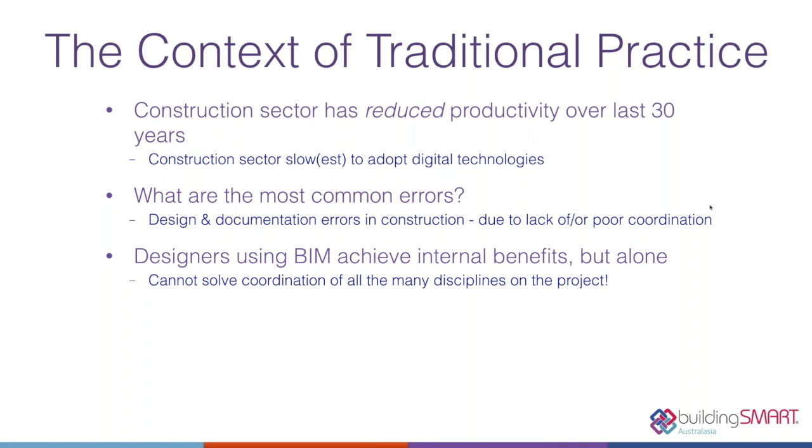And we noticed that although quite a bit of the industry is adopting BIM in their own business, that's not enough. You've got to be able to collaborate and solve the coordination problem. And because we can't share design models, this is another blockage. Where do most of our errors occur? This, by the way, was indicated in an Engineers Australia report in Queensland in 2001 or something. Big structure and HVAC pipe services, small and fiddly equipment, where we have to get down to very close coordination and make sure it's particularly correct.

And of course today, how do we support linear infrastructure, precinct modelling, which is looking at a larger urban scale, and smart cities? How can we address all of these issues? Well, BIM, building information modelling, or digital modelling if we use it more generically, what is its potential? Well, we've got robust geometry. That is proper 3D geometric representations. Objects in a digital model have properties and are extensible. So there are default properties, but we can expand them according to the need or the collaboration we need.

Objects have semantic richness, and one of the important points about IFC is its global dictionary, global terminology. We all talk the same language. The digital model integrates information. We can have reference to other data, and finally, we can do this over the whole life cycle. So we've moved away from just the design and construction process to supporting asset and facility management and operations. And that's where most clients have the biggest benefit.

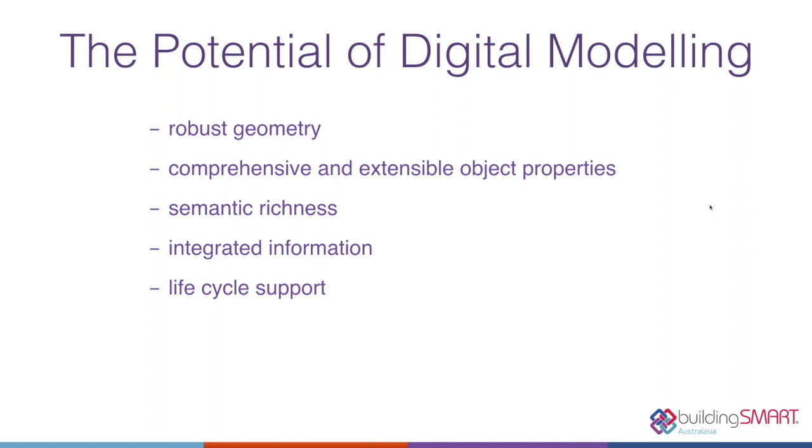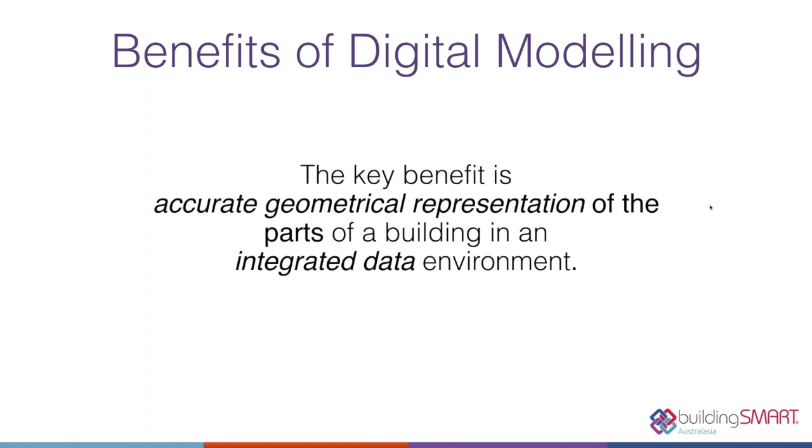So what are the benefits of digital modelling? Well, the principal benefit is this accurate geometrical representation. We couldn't do clash detection without it. We couldn't have high quality visualization without it. And in its integrated environment, we are now able to interrogate with great fidelity. This leads to faster and more effective processes. We can share information easily, which can be validated and value added and reused.

If we share a common terminology, we're always talking about the same object, and that means we can share information easier. We can produce better design. Clients can understand through the 3D visualization, simulation can determine performance, and although that's a modest part of the business today using BIM, that's where one of the next major steps will be. We can have much better understanding of whole of life costs and environmental data. Environmental performance can be predictable. And again, although this is a modest part of the current business, it's a very important element and one that the industry is very close to moving to strongly.

Another advantage is greater production quality. And this, in terms of traditional 2D documentation, is the first benefit. But by production, we also mean manufacturing and assembly. So now we can use the same data derived from the BIM model in the production process.

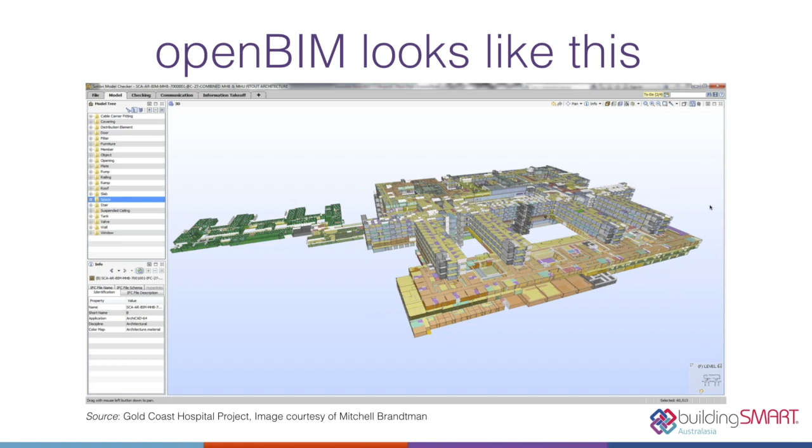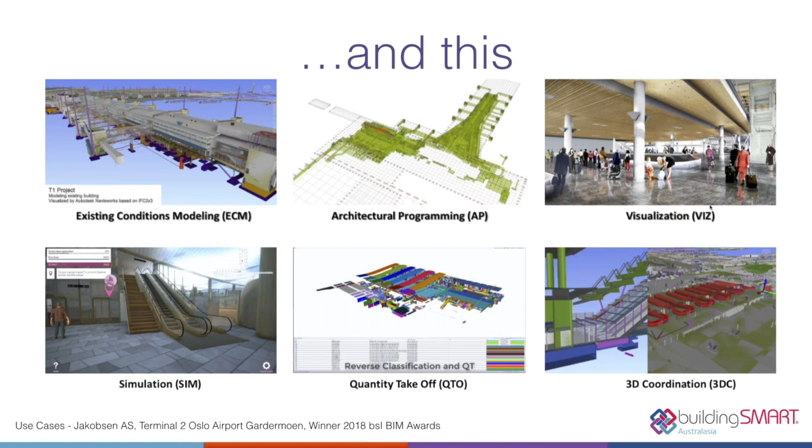What does openBIM look like? Here's a large hospital project in Queensland, a typical large BIM project. Here's another example that's come from the bSI International BIM Awards. Norway won this project, and here we're showing the use cases in the collaboration and how it was adopted for that. And that's just in the competition, some 80 use cases were indicated to show the level of maturity that's approaching in the BIM technology.

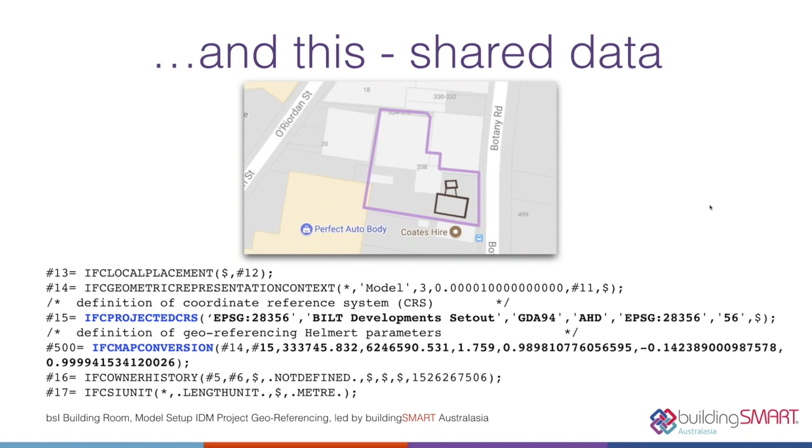And this final example shows how we solve a problem called georeferencing. How do we understand a building that we're going to construct physically on a site versus the object that we might see on a map? And this is a little extension of the IFC standard recently adopted.

So this leads us to, why is openBIM beneficial? Well, the common issue is that there are so many softwares about, and writing interfaces to all of these softwares is just impossible. So the benefits of openBIM: it's a common protocol that allows multidisciplinary digital interoperability, new collaboration processes. For those who've been using BIM, this is one of the biggest advantages. We can now share models rather than drawings, and this improves productivity, identifies problems quickly, all leading to better quality.

I'll mention this point about common terminology. It's very important, and it's one of the big challenges to expanding the use of IFC. We can validate and audit models cleverly by using the computer and the semantics of the data. This leads to fewer errors, more reliable construction timetables, better cost control. Better cost control because we've been able to estimate more accurately at the beginning.

Clients and owners and users don't have to worry about proprietary formats. So you don't have to buy a bit of software because it is the software that your client or your partner use. IFC is available in all vendor software, and we should focus on the information rather than the particular format that has been used. Governments and agencies can be confident that adopting the openBIM approach is international best practice.

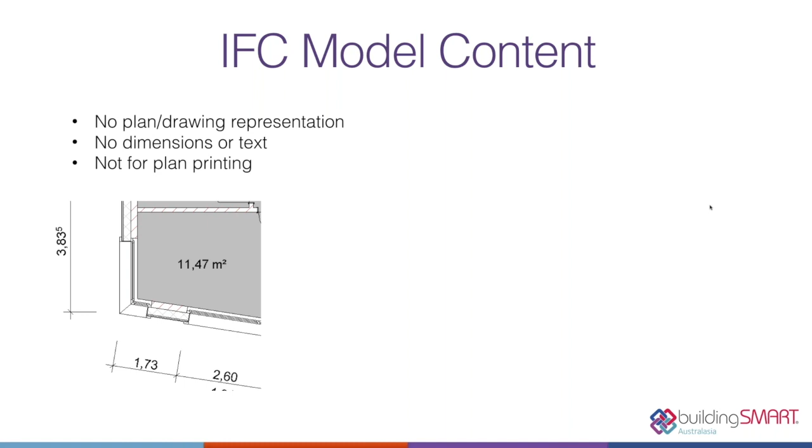And the final one is one of the more important practical parts of IFC, called model view definitions, or MVDs. These translate the process we've defined above into the technical requirements. What actual information we need to solve those problems. So this leads to a question of what is in the model. On the left, you have a traditional 2D drawing. But IFC is a model.

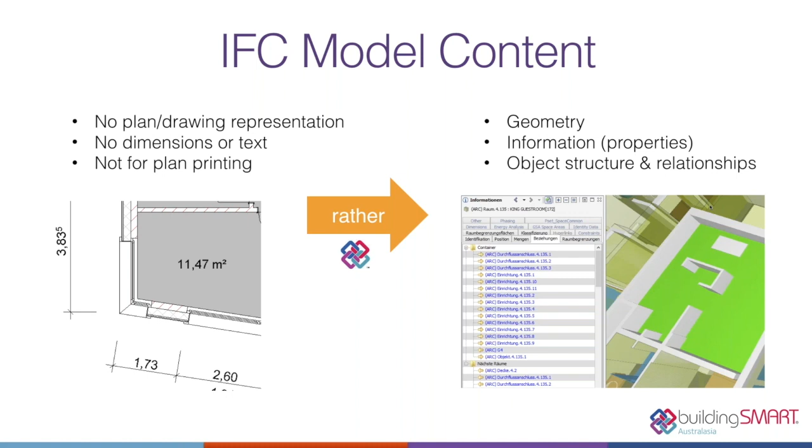So we visualize the model accurately, easily, and then we're able to interrogate and understand the data in the model because it's all part of the IFC schema. We understand the object structure, we understand the relationships. This space is on this building level with this name, of this building with its name, on this site with its site ID, on this project. And this structure is the backbone of how we understand information.

So model definitions have been in place for quite a while. The IFC 2x3 version of the standard developed what was called the coordination view. This is a view that is widely used in the building space, representing the key disciplines in that space. In IFC 4, the next version of our standard, which is starting to be used and has significant improvements, we have another view definition called the design transfer view.

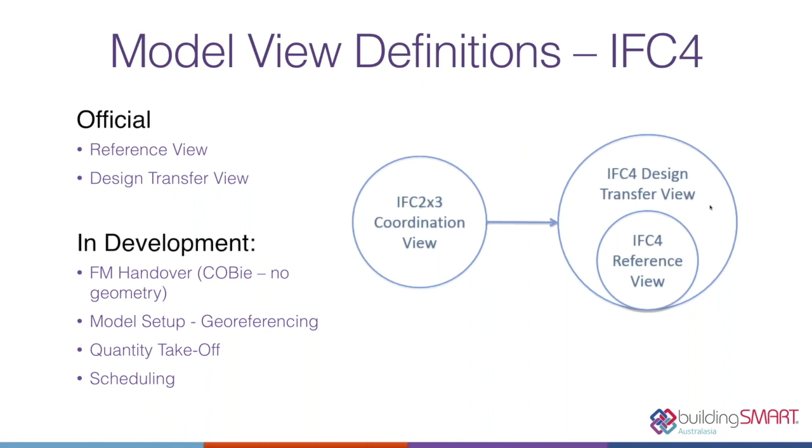This is underway at the moment and is aiming towards a higher quality information content that would allow other consultants to take that model data and use it effectively in a new project or in an extension of the original project. And the IFC 4 reference view is largely common to the coordination view. Other model view definitions are in place. FM, with COBie as a part, model setup, I mentioned that before, quantity takeoff scheduling, there's much more detail about this.

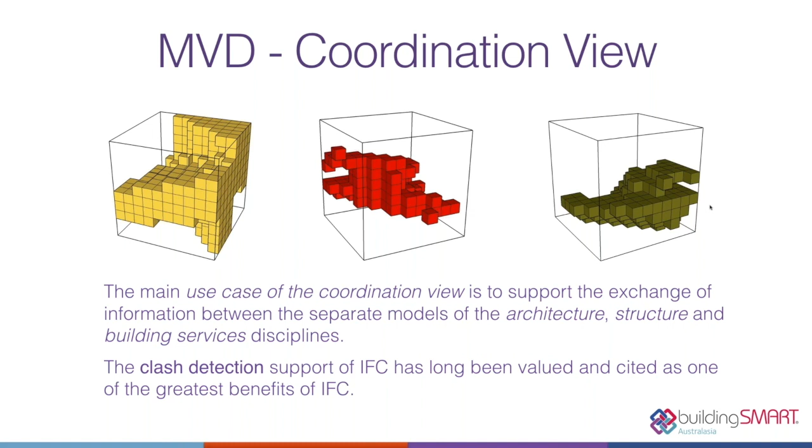So model view definitions, here's some more examples. Coordination view shows the key bit of their structure coming out of an architectural model. Here's a structural analysis view, different objects representing the same discipline. And then we might have a thermal analysis view where we've got spaces, the properties against those spaces, their occupancy, the wall elements needed for the transmittance, geographic location, all those sorts of things.

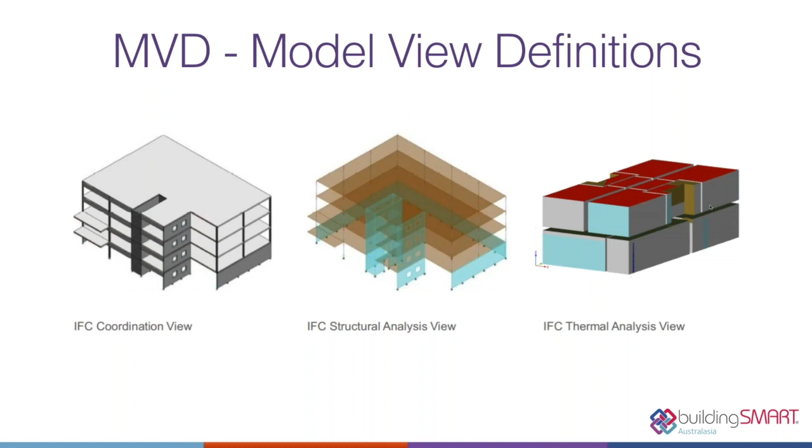So what's the history of the IFC standards? Originated in '94, in 2013 became an ISO standard, 16739. In Australia and New Zealand, IFC was adopted as an Australian standard in 2017 and currently underway under enormous global support, we've got an extension for bridges, which is almost ready for release. This includes alignment for linear assets.

So the current work going on internationally has a big focus on infrastructure extensions, and these are the emerging extensions in IFC 4. So we've got road, rail, ports and waterways. Road and rail are well underway, a lot of Asian involvement as well as European in those projects. And then we have emerging extensions for landscape, utilities, urban space and tunnels. So you see the scope of work going on at the moment is extraordinarily comprehensive, and we've moved away from a single building view about BIM to a much larger urban representation of urban landscape and cities.

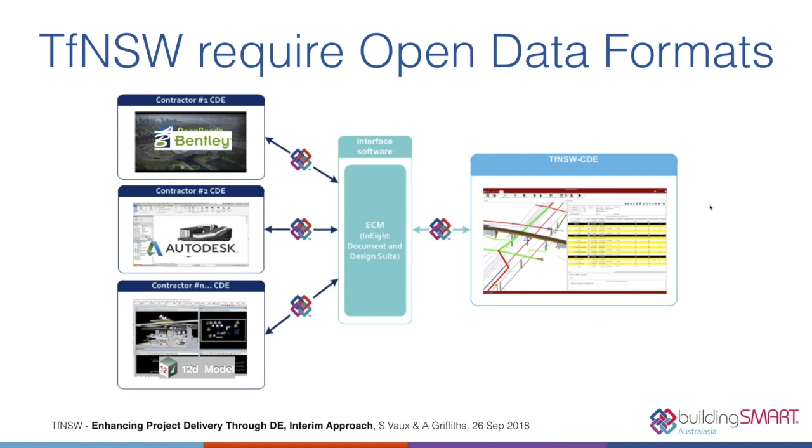And finally, we see some recommendations. So how can the industry prepare? Well, we have to get used to using integrated common data environments. We have to understand better how to output and import in open data formats. That's a role that buildingSMART Australasia is particularly committed to. They want to develop design rules libraries, so they want more intelligent adoption of design processes. They also want to push into manufactured assembly.

We see that in the Australian building services industry. We have a couple of exemplar organisations that are already doing excellent work in that supply chain. BIM-MEPAUS is the organisation doing it. We should see in them a role model for many of our other supply chains.

And finally, education. Education has been lagging in the TAFE and university sector. It's being taught at a very casual level, but we need to do better, and buildingSMART has already started to help organisations accredit their programs for teaching BIM and DE, and also we offer our BIM Creds program where you can get a verification of the level of knowledge that you might have about BIM, that we believe is an important criteria for your employers and your project partners to adopt.